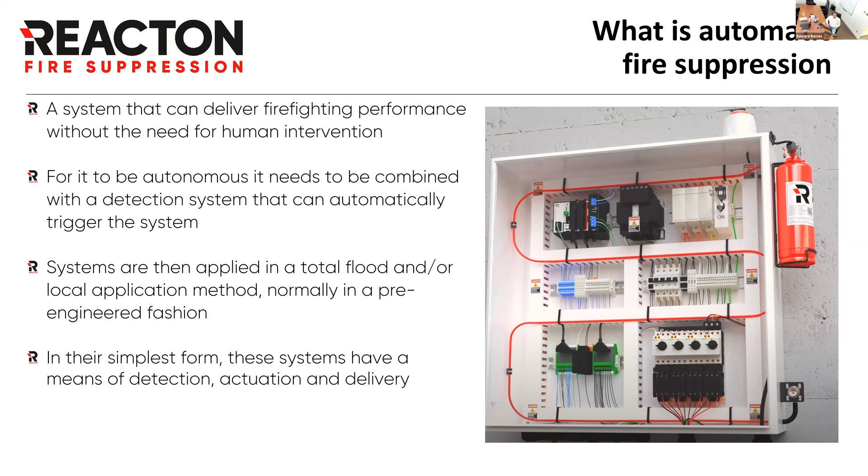Just a brief overview, I'm sure we're all familiar with it, but what's automatic fire suppression? It's a system that can deliver firefighting performance without the need for human intervention, to be autonomous, combined with some form of detection and automatic activation of the system. The systems can either be locally applied or applied in a total flood fashion, or normally, as we discussed, in a pre-engineered fashion for the type of applications we're talking about. But in their simplest form, the systems have a means of detection, actuation, and delivery.

So just a bit of protection when we're looking at localized systems. We've got basic principles of fire protection, so we've got sprinklers that we're all very familiar with, and it's great in the Middle East, UAE, that there's a much higher adoption rate of sprinklers in buildings. In the UK and Europe, it's still something I feel we're very much behind in, and that's why some of these local systems we're going to cover really are of use in sectors where sprinklers are not present. Sprinklers are good at protecting property and life, but as we know, there can be significant damage with them, and also it's not a localized application or detection.

So we've obviously got handheld extinguishers and fire blankets when we're talking about kitchen systems. Again, they need manual human interaction and are not automatic, as we discussed. The automatic fire systems we're going to talk about today have no human interaction needed: automatic shutdown of the assets they're protecting. It could be a kitchen, it could be isolating power, it could be a control panel, again isolating power. Localized fire suppression achieves minimal damage by detecting early and targeting the suppression locally.

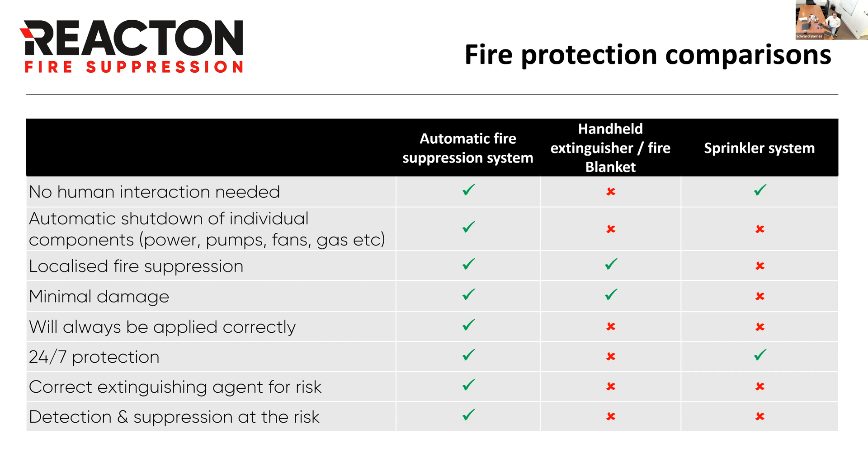And basically the fact that they're operational 24/7 without any need for human interaction. So one of the things we look at when we're talking about local application is the risks are not confined to just the particular local asset.

Think of a control panel inside a building. If the building has a fire system fitted, like a sprinkler, you're going to be able to protect the room that the control panel's in. But if there isn't a localized system on the panel or in the room, then you have the effect of almost no fire protection at all.

Fires start small and out of sight. It's common for most building fires, not always in heavy equipment and vehicle applications, but in most of the applications we're talking about, to be localized, very small fires that then grow into bigger fires.

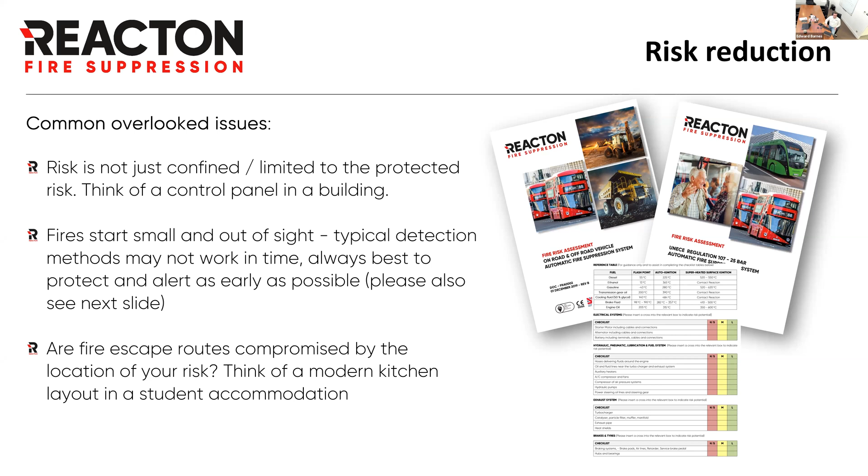One especially common problem on the kitchen side is fire escape routes compromised by the location of the fire risk. That's how kitchen systems came about, with designers wanting open plan kitchens in student accommodation, but that goes against some fire design best practices, where kitchens were located basically on direct escape routes.

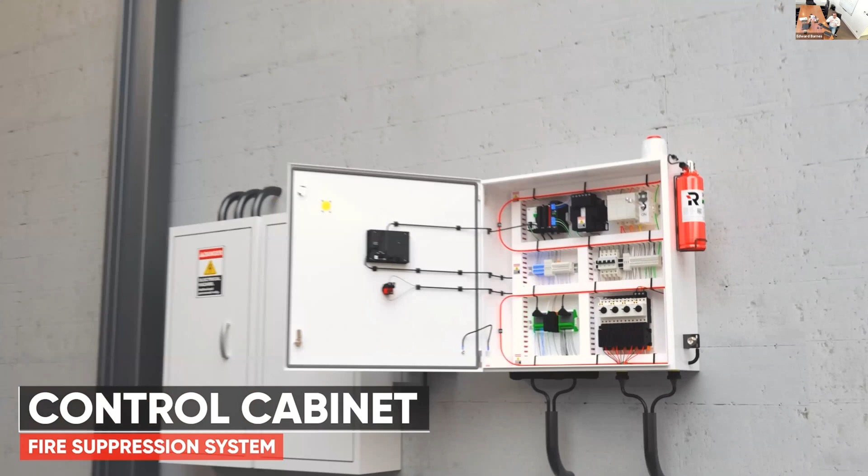So we're going to quickly look at a video. I'm just going to hit play, and hopefully this plays for everyone. This is just a short animation to give you an overview of protecting control panels. One of the key things we try to do is a lot of education around these.

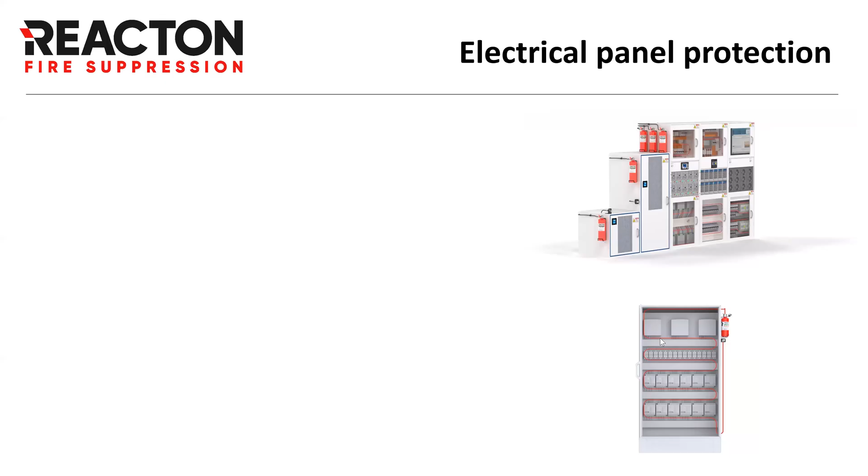No, I'm just starting with Ian, because Terry's question again got cut off. Yeah, okay. Oh, you're live. Was that me, or am I okay? I'll continue, I think that was someone who came in then. So you're all good, Ed. It was just somebody switched the microphone on by mistake. That's fine, I was just making sure it wasn't my technical problem.

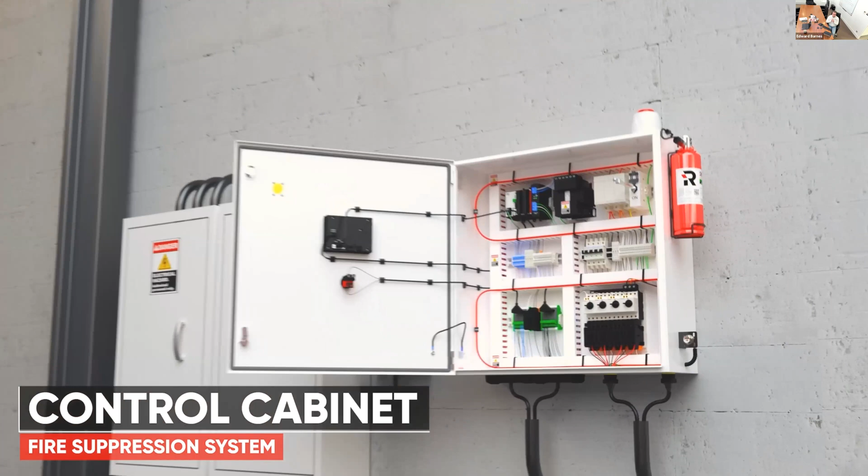So yeah, this is a really basic system that detects and suppresses fires inside control panels. In its basic form, we use a pneumatic heat sensitive tube that will melt and burst when flame or heat is applied to that tube.

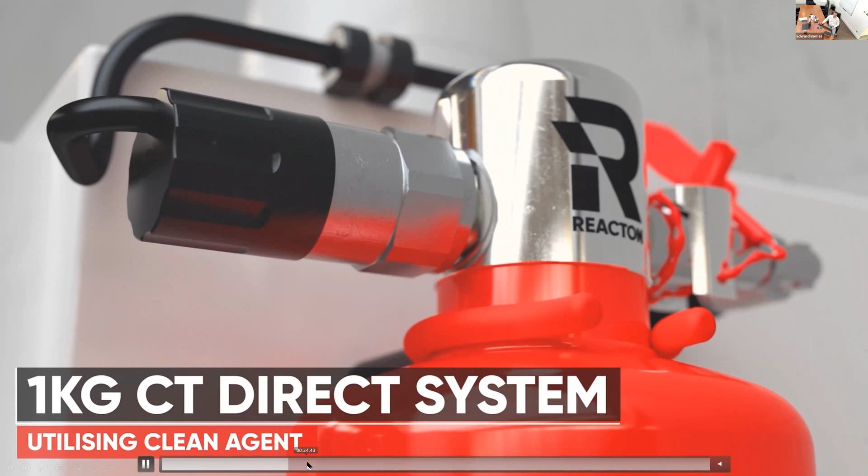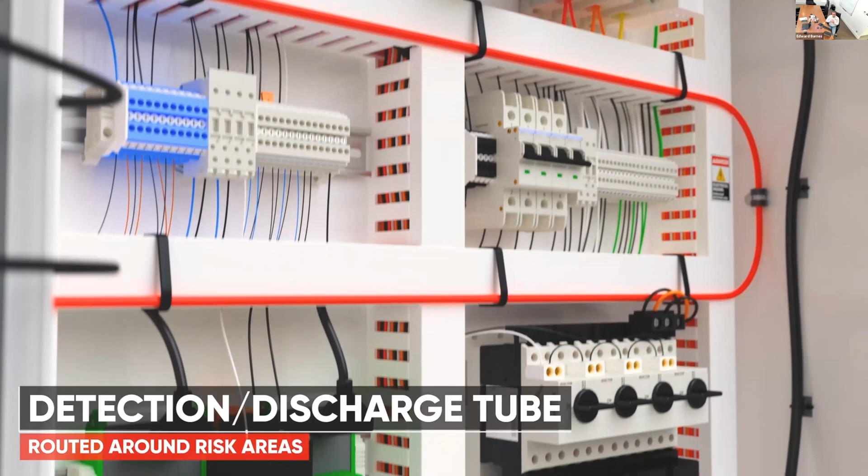If we're thinking about a control panel in an MCC room or a control panel in a warehouse, these are becoming very commonly required items from insurers around the world, part and parcel of providing a localized solution for mitigating risks. An example recently was a control panel set underneath a rack of goods in a warehouse. If that control panel had caught fire, it's likely to take the stock and the control, basically all of the stock in the racking above it. That's an example of how the application can be put in place.

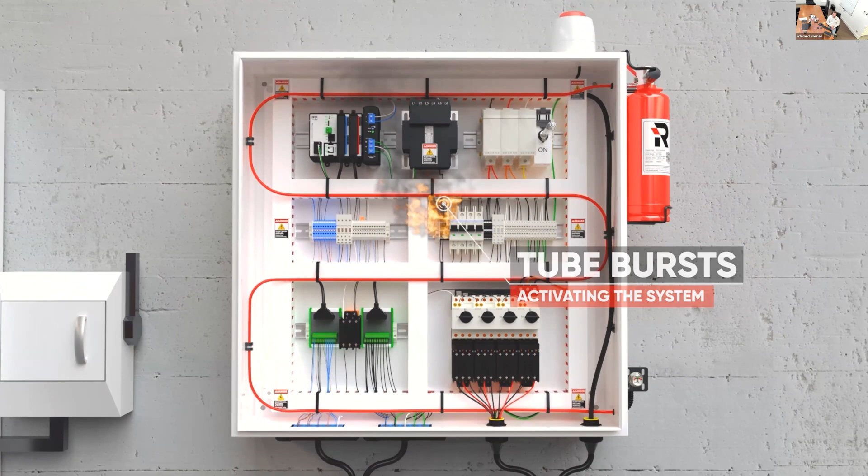So what we've got here is an electrical fire. It's going to burn through the tube. What you'll see, it's a bit slower when I'm talking, is the tube bursts. And in this instance we're using a clean agent, either Novec 1230 or FM 200, to then fill the cabinet in a flooding environment to extinguish the fire.

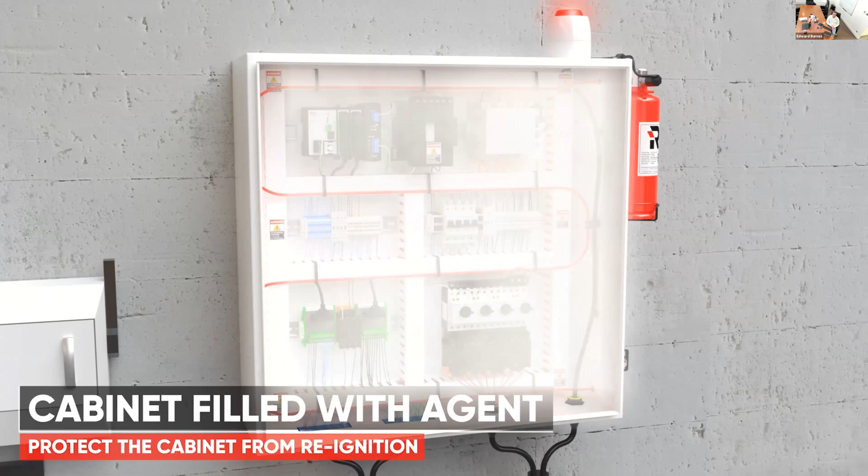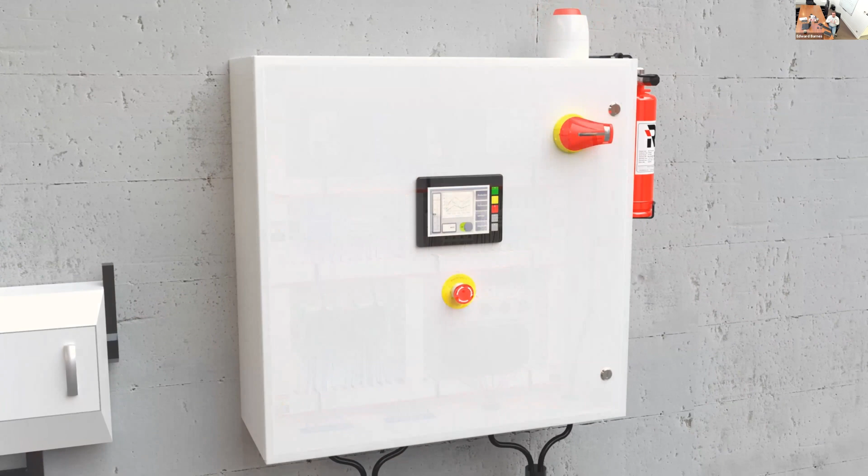So there's no real complicated parts to the system. It's a really cost-effective, easy to fit way to protect a localized risk. And as Philip talked about in the previous presentation, the systems can be linked to central management systems for building control. They can be given localized sounders and beacons as well, for operators that are near larger control panels in factory environments. So that just gives you a brief overview of the control panel.

So typical agents that can be used on these types of applications and systems. The detection methods, as I said, pneumatic heat sensitive tube, or we can use an aspirating smoke detector. There are various different approvals that can apply to these products. The common one for control panels is LPS 1666.

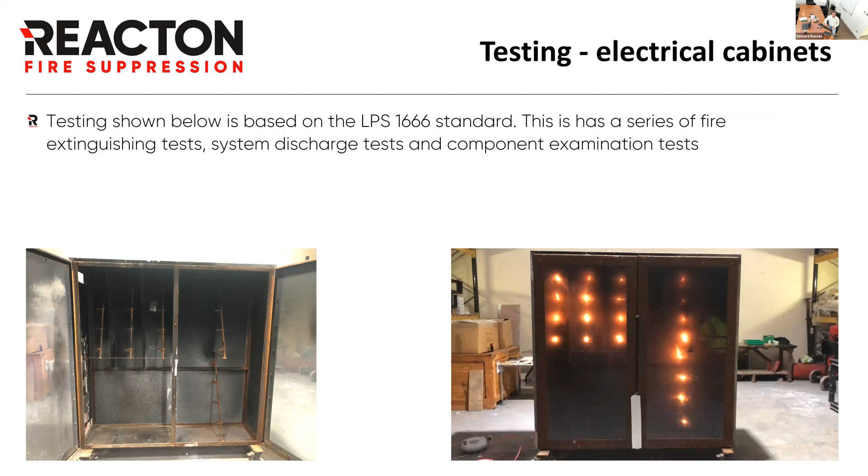There's just some more information at the bottom, but I'm going to quickly go through this because we're going to run out of time. So what kind of testing is used? There's rigorous testing with LPS 1666 that looks at the capabilities of the extinguishing agent, the discharge time, very similar to those applications for total flood that I'm sure lots of you are very familiar with. This is just a short demonstration of the kind of coverage tests performed during that standard, but I'll roll the video on so we get time to talk about the next chapter.

So as a brief, just before we go into kitchens, a really simple localized protection product that can be targeted in high-risk areas in buildings, but also in warehouse and industrial facilities, and is becoming a mainstream risk mitigation product for a lot of building insurers.

So the next section is domestic kitchen protection. This is localized kitchen protection, not commercial kitchens, but student accommodations, household kitchens, though we predominantly see the market take the product for student accommodation and flats in high-rise buildings. Typically a Class F chemical is used, so a standard commercial kitchen wet chemical.

Again, detection methods are pneumatic, heat-sensitive tube, or thermal detection. Some approval information for the product.

The approvals for this type of system is something we're still in mainstream development of, to develop a full approval for this size. A lot of the current witness testing is done based on the commercial kitchen standard, but it's something we're actively trying to encourage approval bodies to engage with, to really push this localized fire protection.

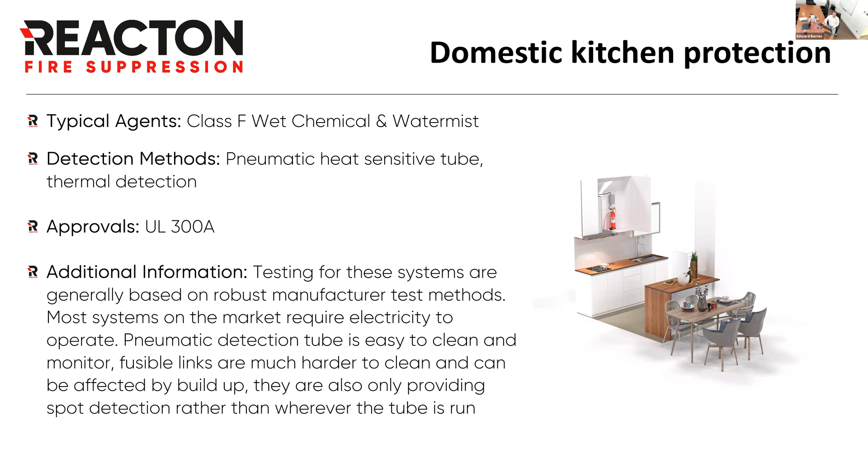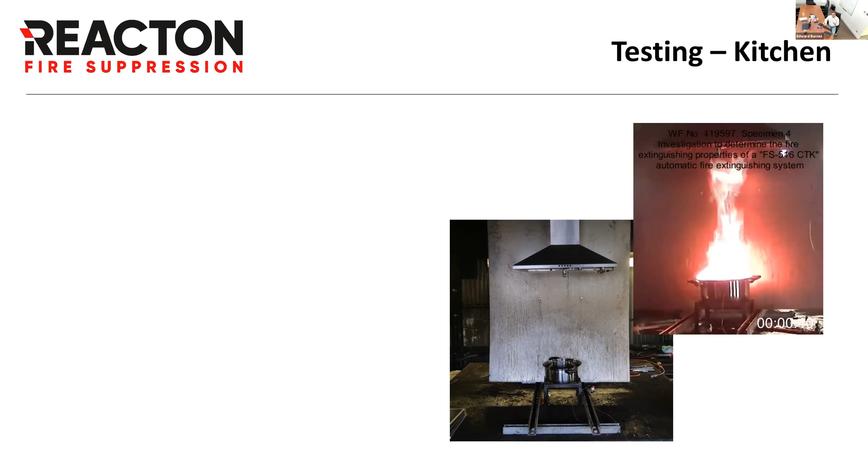So we've just got some test footage of single hobs. This is mock-up test footage we've done with some approval bodies to demonstrate the small-scale effectiveness of these systems in mitigating what would be a single hob fire or a single pan fire, and the ability to integrate these into shut-off systems for gas or electrical shut-off.

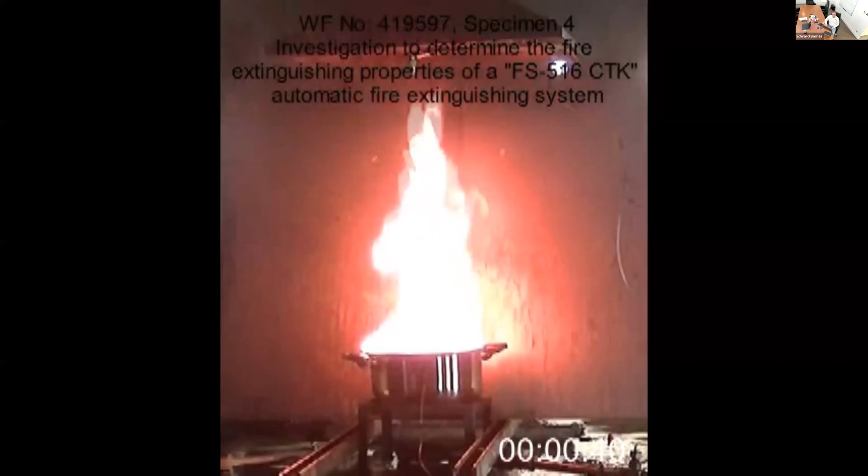So you've just got a quick video here of a wet chemical system. This is a single nozzle, a very small cylinder that often sits in the cupboard above the hood or below the cupboard, typically within 3 or 4 meters of the risk being protected.

So that's hopefully a very brief overview and some test information on that type of product.

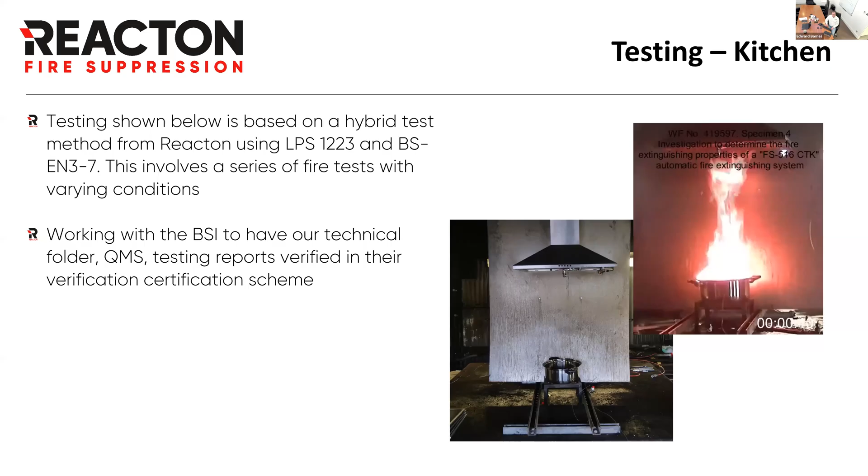So just to recap, in a very limited amount of time we've looked at two ways that local, very common risks can be protected locally in buildings. The control panel one is really interesting because it's been a long time coming where insurers haven't been able to determine the best way of tackling an isolated risk in a building like a warehouse or

some kind of industrial building, where full building protection isn't particularly necessary. Not so much in UAE and Dubai, because you've got such great adoption on the fire safety side from the fitment of sprinklers and the fire code. So it's just a very good risk mitigation part, and the domestic kitchen system is another example of a localized fire protection product.

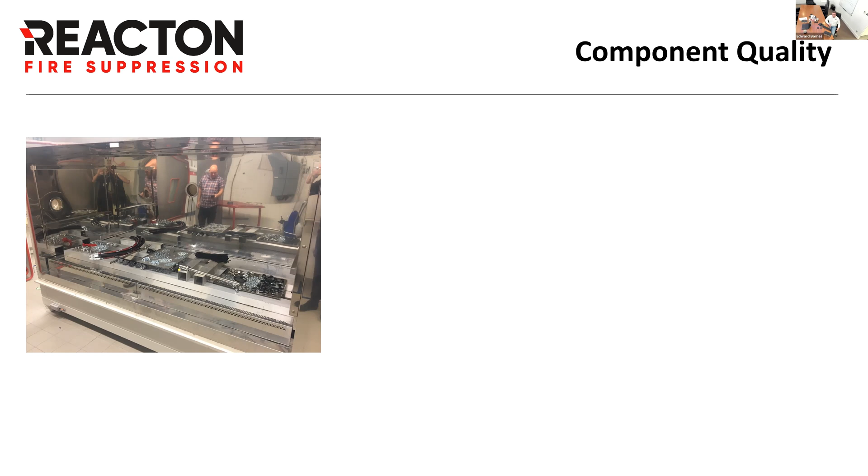The last thing, something Ian touched on right at the start, was about the competence and quality of products and how product testing is performed. In a lot of cases for full building systems and very common products - sprinklers, total flood systems, and as in Philip's presentation, fire alarms and fire detection systems - there is a really robust test protocol in place.

As you come into local applications, we've found over the years, especially in our journey, that there isn't enough testing and not enough certification for localized products, especially the ones we're talking about, and the testing that is performed isn't quite done at enough of a component level.

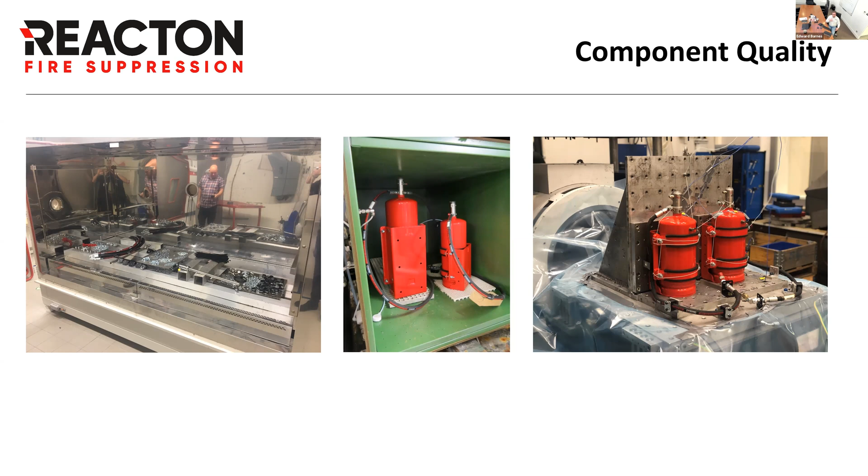So there's a real heavy amount of time and investment put not only into quality testing of our products and assessing their longevity, but also helping approval bodies and insurers understand why it's important that the competency of the people manufacturing these localized systems is put at the forefront of how we protect these localized risks. With smaller systems it's easier for manufacturers to enter the space and make a product, but there isn't enough competency and regulation around manufacturing these localized systems.

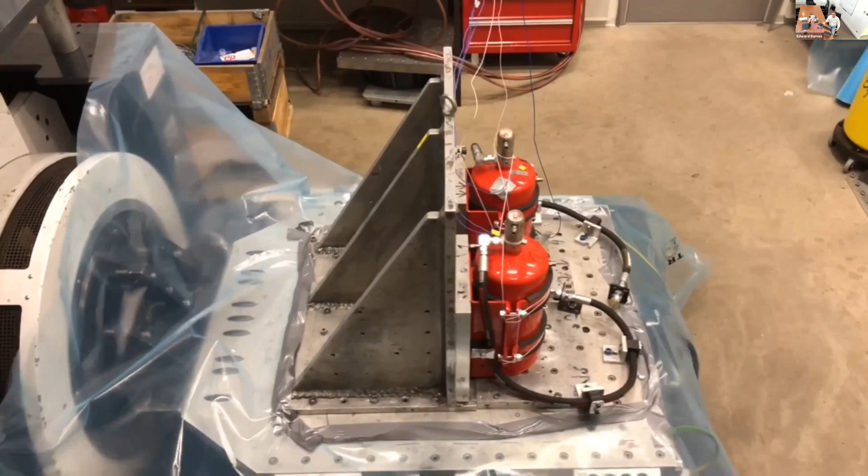This is an example of some of the vibration testing we're talking to various bodies about, which is important because of the quality of components that, while they may not fatigue in the short term, include things like plastic parts when they really should be metal parts. That's the research, development and engineering side we do behind the scenes.

So that was a very, very brief, rushed overview of localized fire protection, and I don't think I've done too badly with time either.